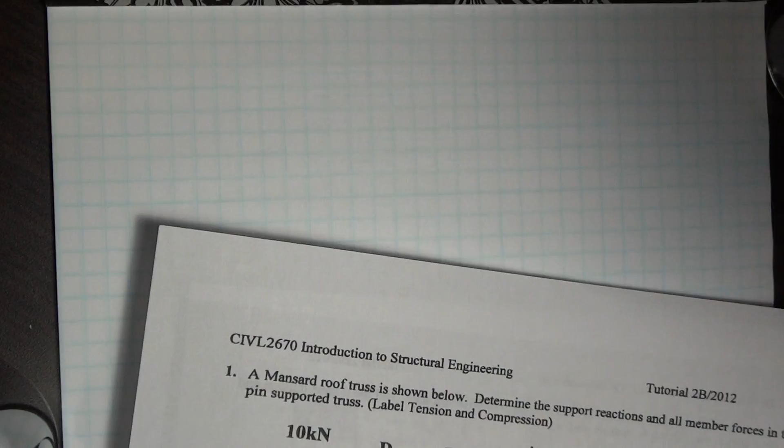Hey guys, this is problem 4 for tutorial 2.

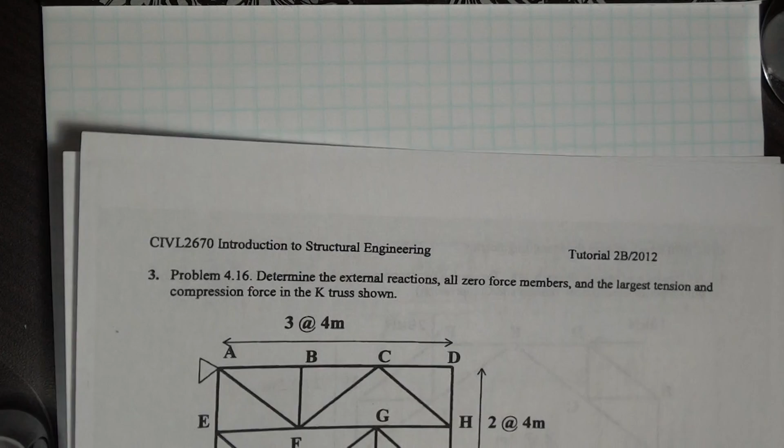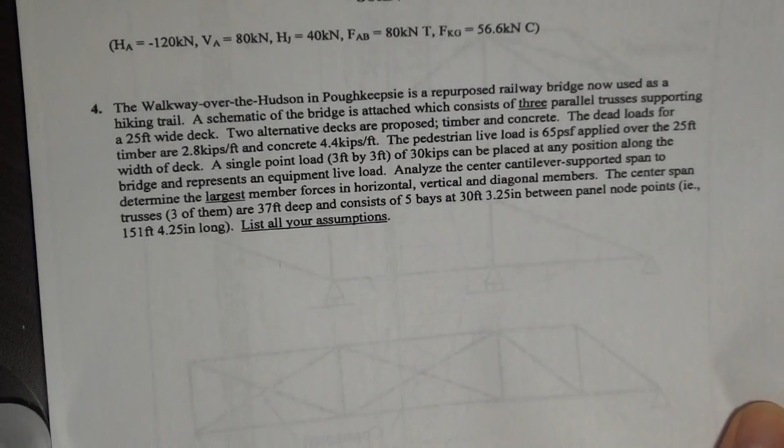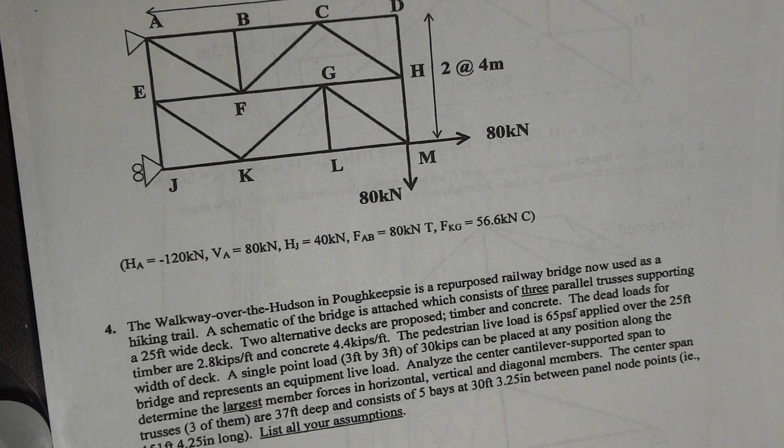But here is problem 4, and I think it might look intimidating, but it's actually maybe the easiest truss problem you'll do in this homework set. The hard part is deciding what to use, because unlike other cases where you had to analyze forces, here you also have to determine what load you want to use.

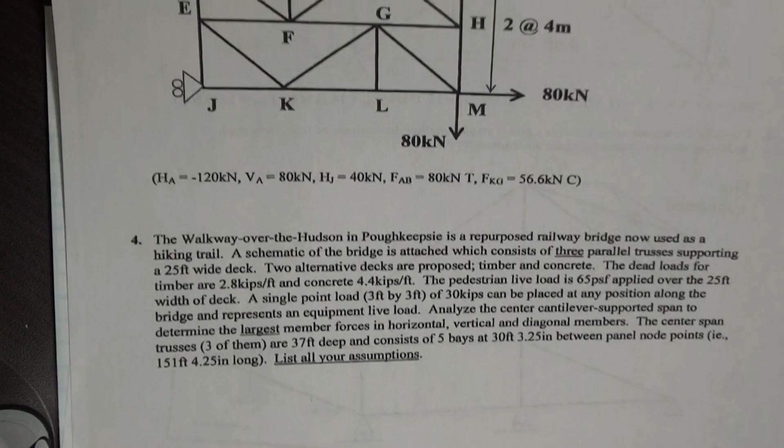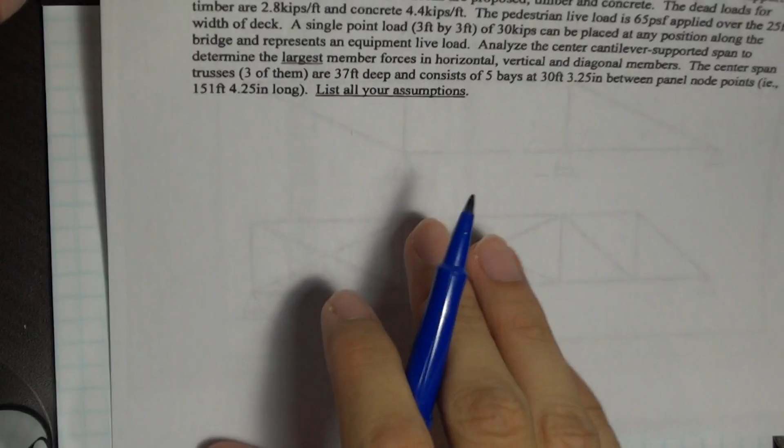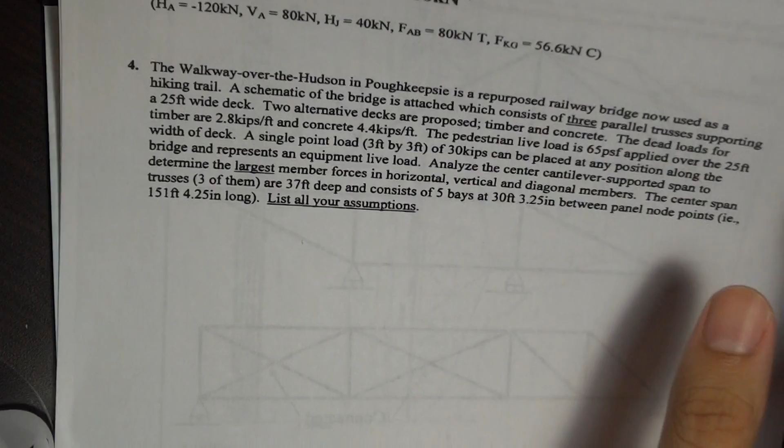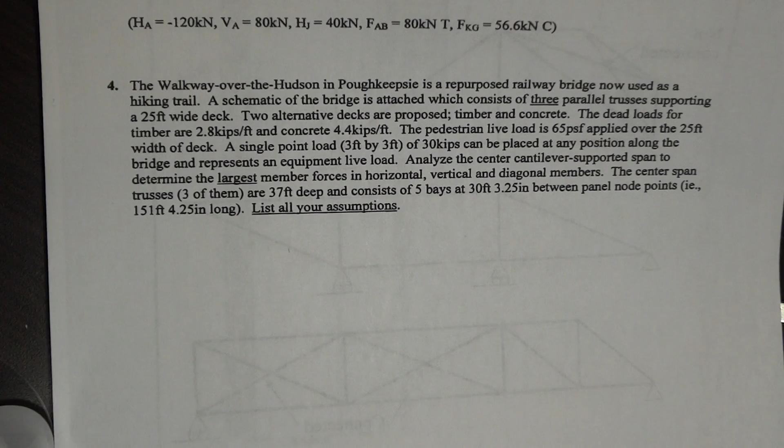It asks you to list your assumptions, and I'm pretty sure that as long as your assumptions are listed properly and are reasonable, you'll get full credit, assuming you do the calculations properly. Everyone's going to have slightly different assumptions, and they may or may not affect your answer. If you came into office hours, I may have gone into too much detail for this. After looking over the solution, I realized the professor is just looking for some very broad answers.

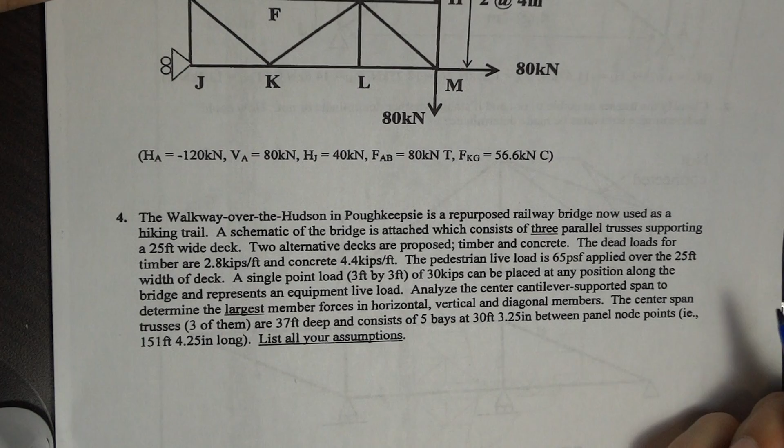Okay, so let's look at this, more of the important things. It says there are 3 parallel trusses. That's one important thing.

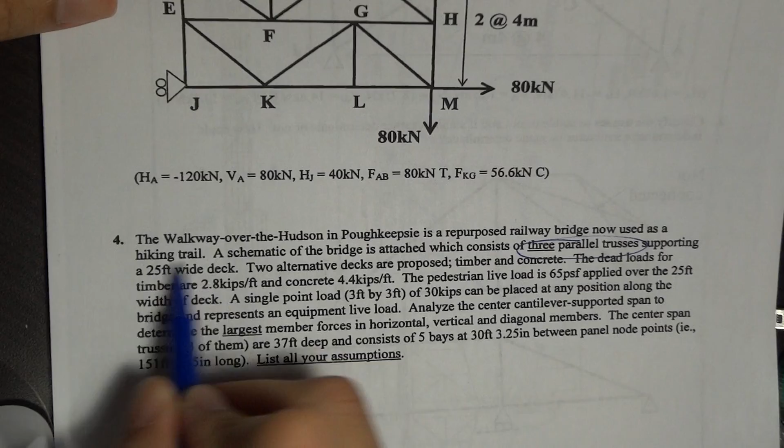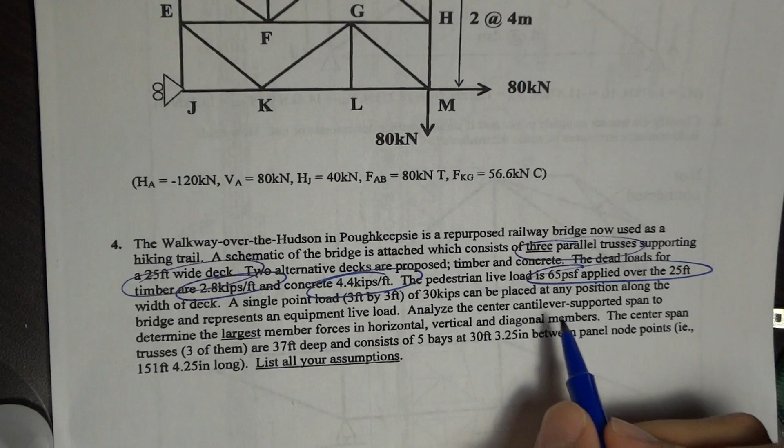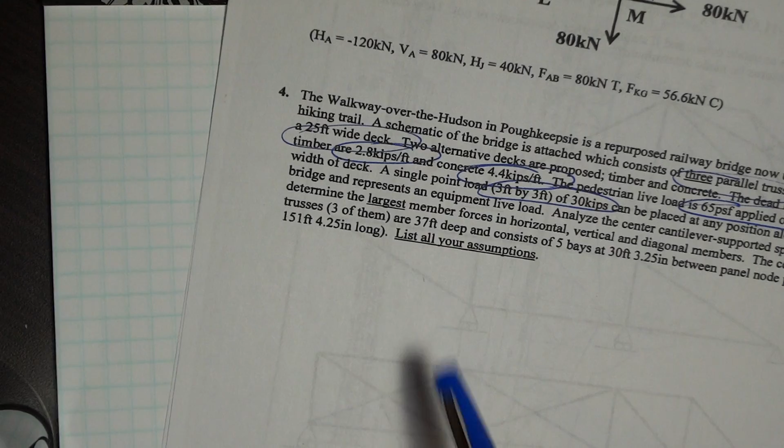The deck is 25 feet wide. The loads are 2.8 kips, 4.4 kips, and a 65 PSF load applied somewhere. The PSF load is your live load, and your point load is 30 kips. These are your given dimensions. You do not need to worry about load factors, but we have to worry about things like how you're going to divide the load on the truss.

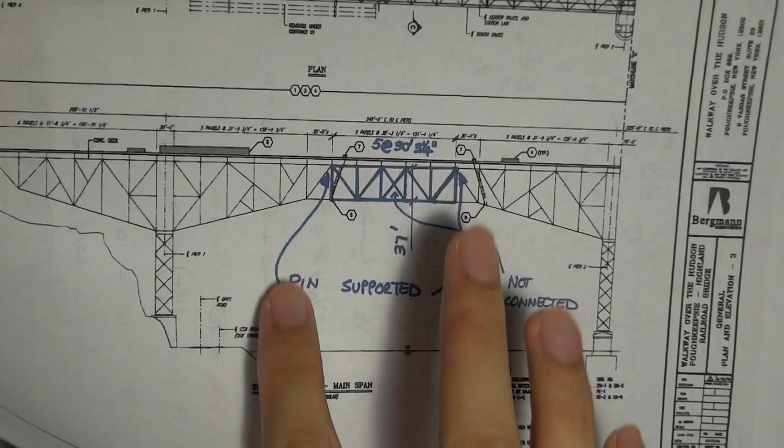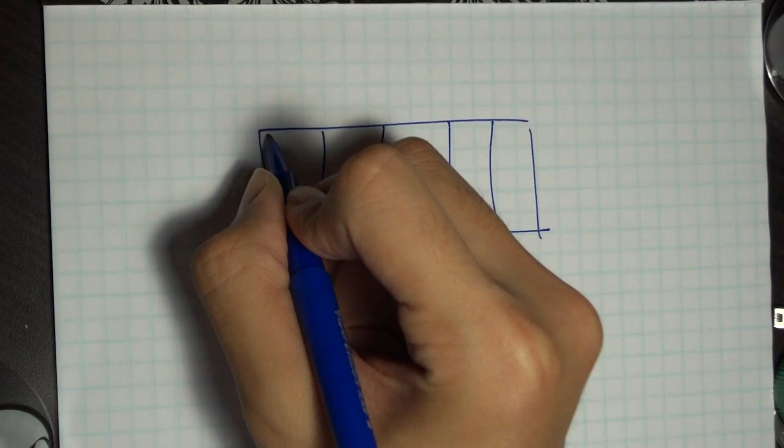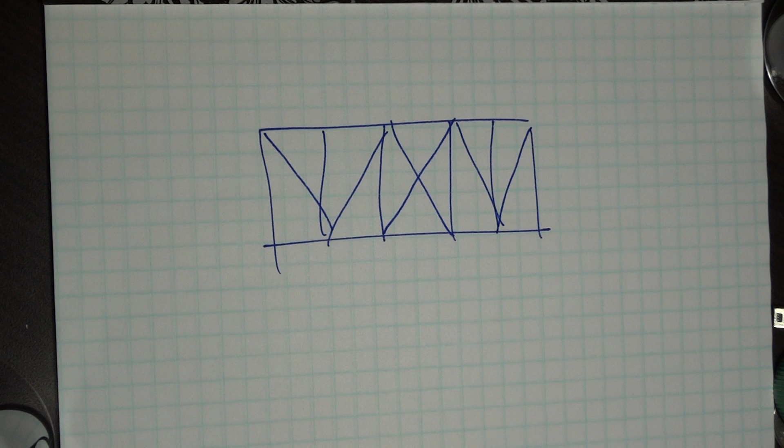So let's look at our truss very quickly. This is your truss, your truss element is here, and I'm just going to draw that for you very quickly. Your truss is divided into 5 equal sections like this. I did not do a very good job drawing it, but you get the idea, you have it in front of you. This is pin, assume this is not connected.

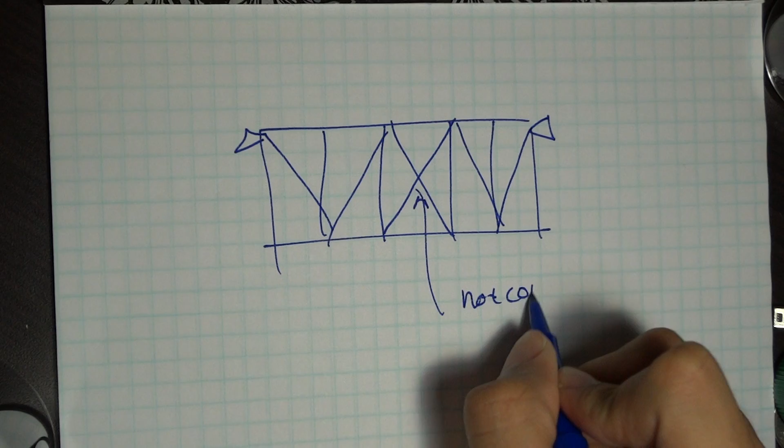Okay, now you know that this is 25 feet wide going into the page. The professor has it drawn right here.

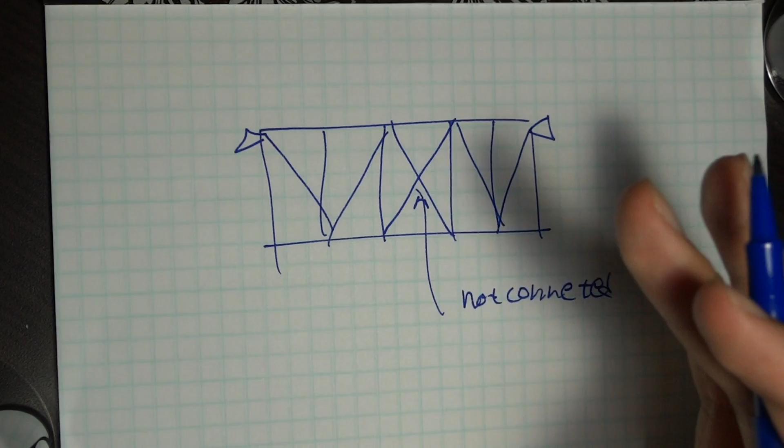There's a couple of ways you can divide this, because although you have 3 trusses for this 25-foot wide span, you don't assume each truss carries the full load. You need to divide it in some way.

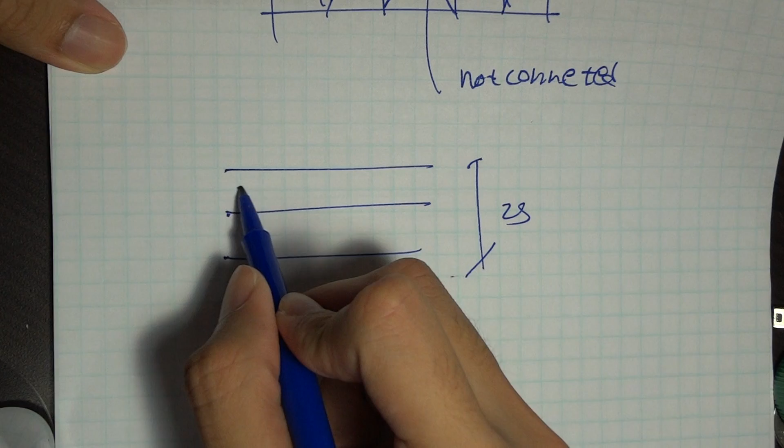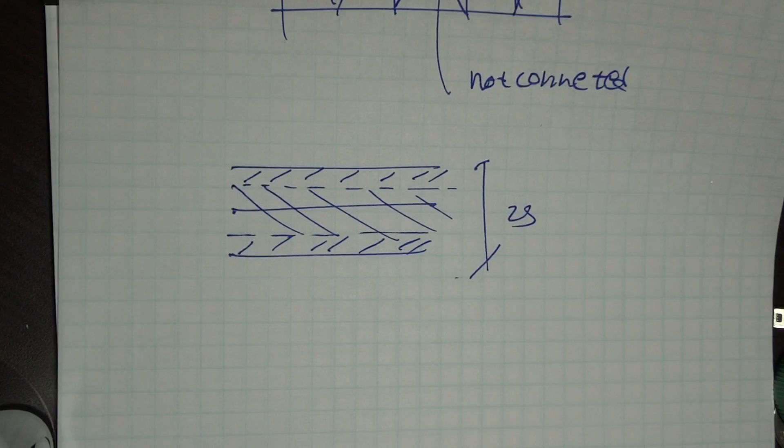Those of you who came into office hours probably remember I told you to do something like this, where this was 25, and pretend this is like a tributary area kind of thing.

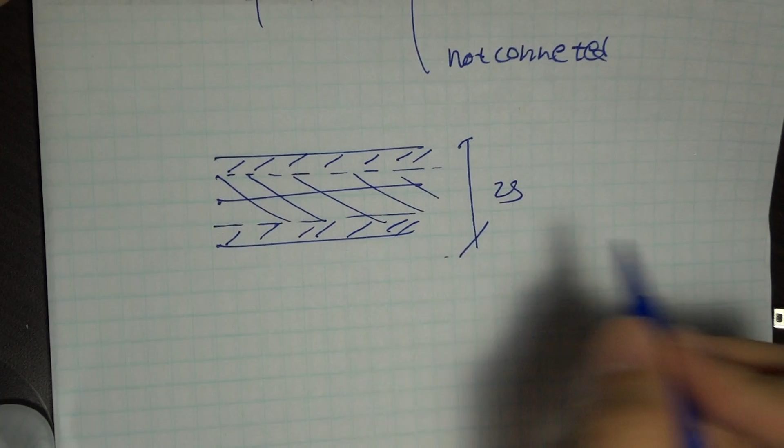So I was saying that this truss would get 1/4, this truss would get 1/2, and this truss would get 1/4. The professor uses a slightly different way, he just says divide it by 3. You can use either, one will probably be a little closer, this one is a little more extreme.

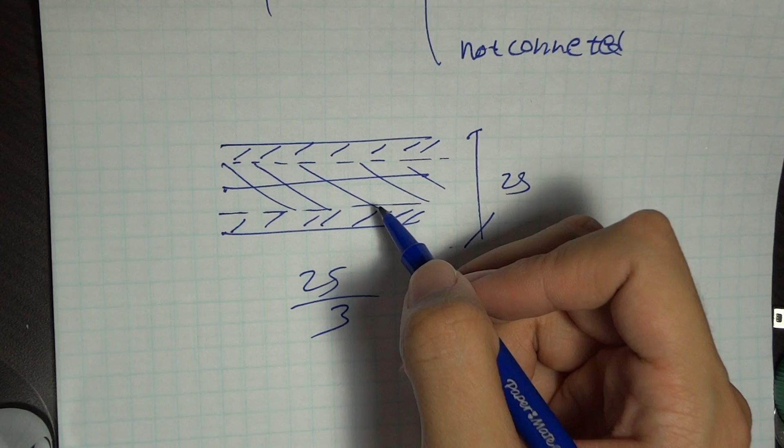But it's up to you, just list this as one of your assumptions. For example, assume the trusses are at the end and center, whereas this one assumes the 3 trusses are spanned equidistant. I don't know what else you want to do for that.

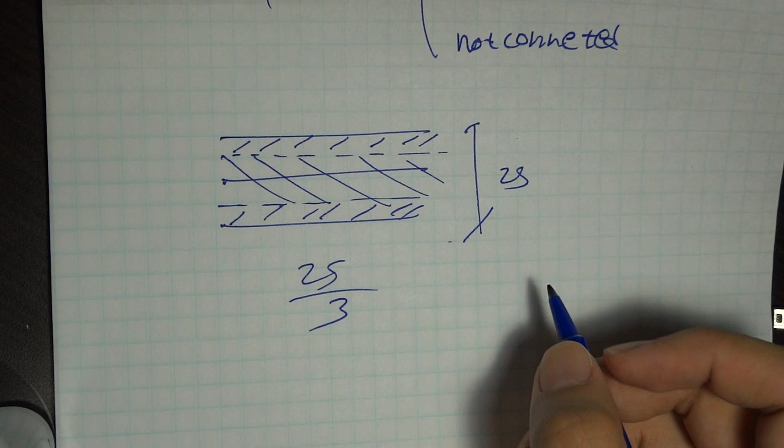Let's go with the professor's example, since it makes the numbers a lot easier to work with. We'll leave this as TW, and this I call T. I would use this for tributary width. It's a term you'll learn later if you aren't doing that already. Some of you who have already taken design courses would probably know more about this term.

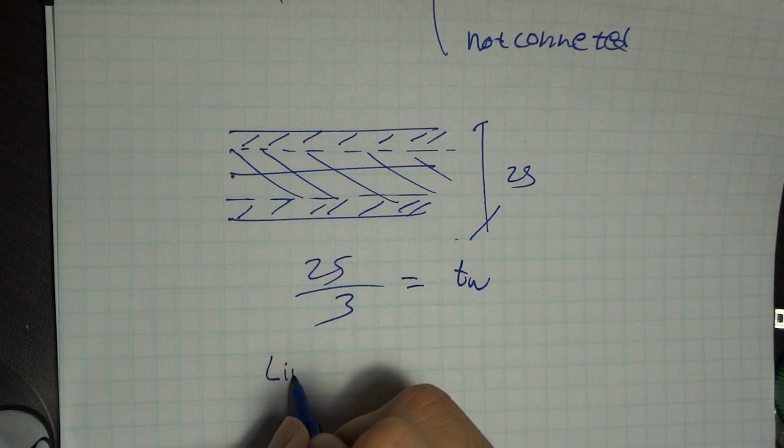Our timber load, our concrete, and our pedestrian live loads are all given in terms of kips per foot already, so we don't need to worry about that. The live load is given in terms of 65 PSF, we don't want PSF, we want pounds per foot.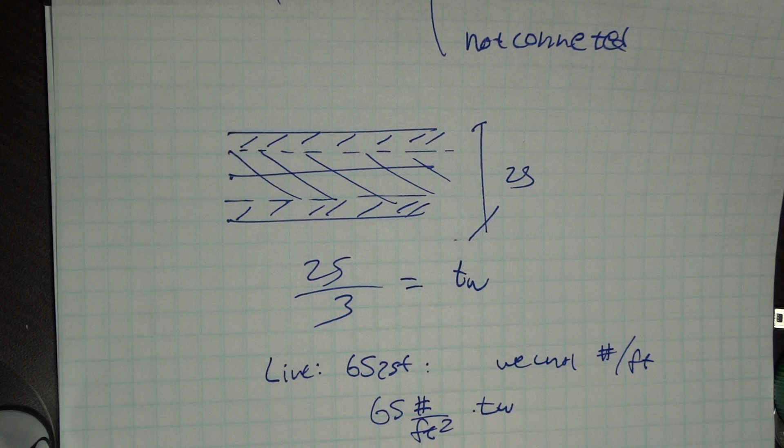So what you're going to do is just multiply times TW, and TW is in units of feet. So this is going to become, and that'll give you the weight per foot of truss. So you have the weight here, and you're going to bring everything to the truss itself, so you're going to shrink it from 2D to 1D.

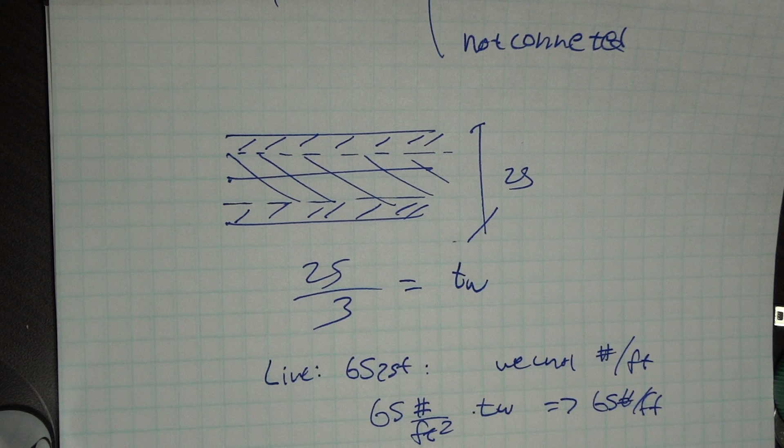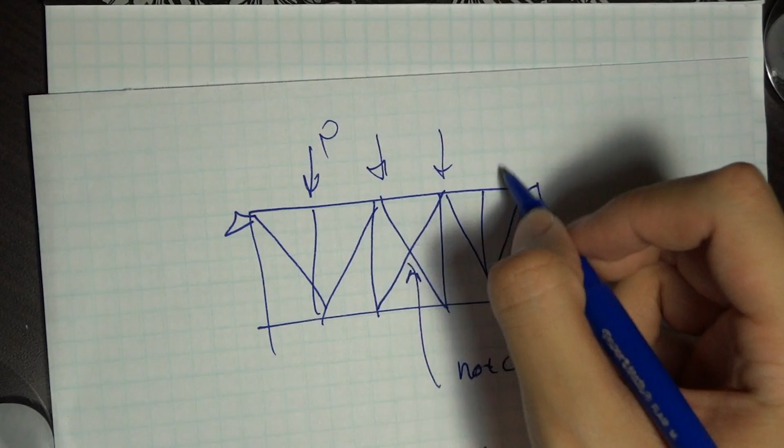Yeah, and then that's pretty much it. I mentioned to some of you that you can put the load P here, but try moving it around to see where you get your maximum P. Like try putting it here or here or here. Well, obviously these two will be identical to the other one, just reversed. But yeah, just try moving it around a little, see what you get.

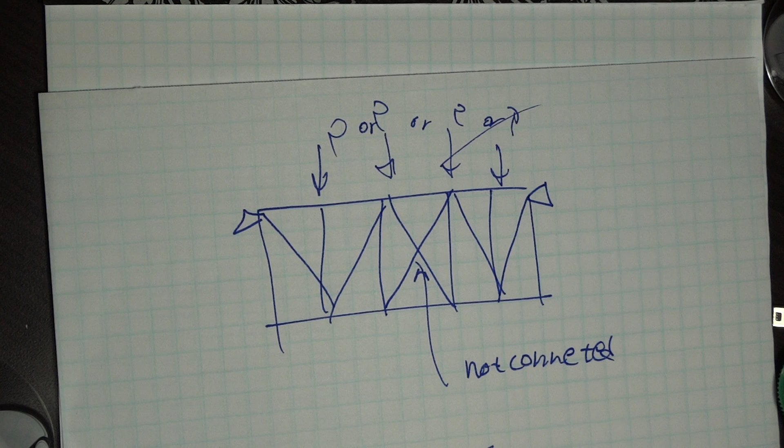Feel free to use RISA for this problem, because RISA will make it easier. RISA is particularly good when you need to move stuff around.

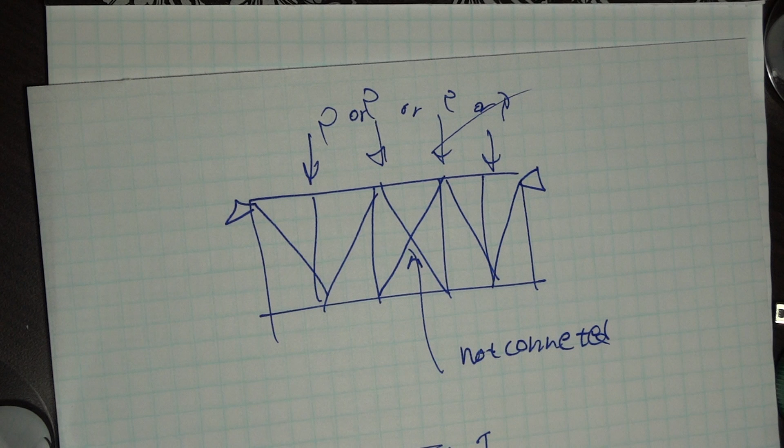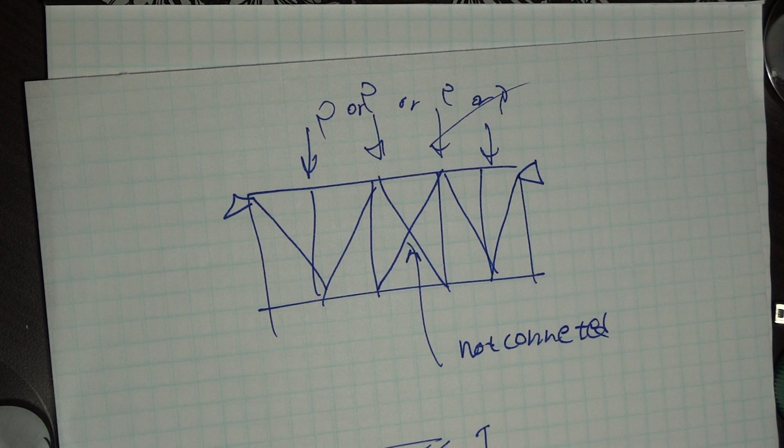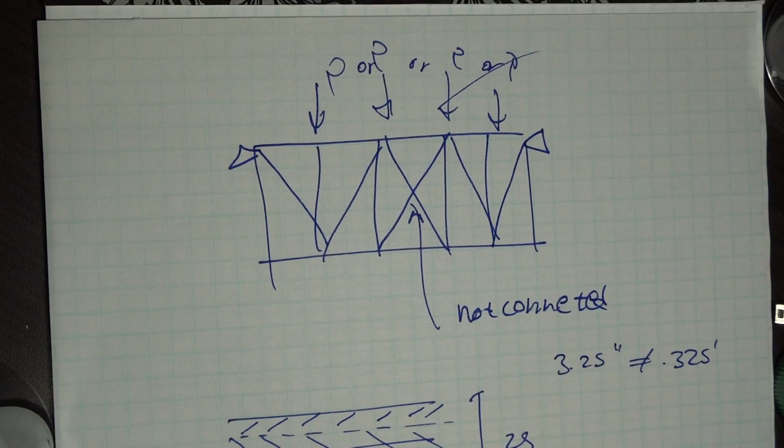That's pretty much it. Don't get thrown off by the dimensions it gives you. The dimensions might look a little bit odd, but all the information is there. You just need to be precise. Remember that 3.25 inches is not 0.325 feet.

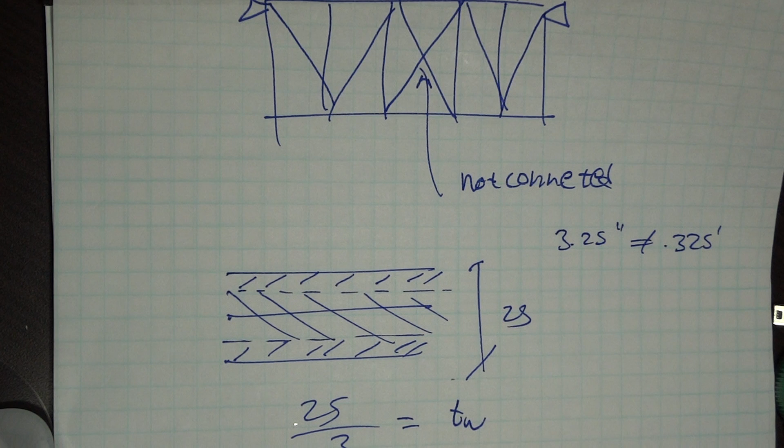I don't know if you guys will make this mistake. That seems like the kind of mistake that I would make. I make very, very silly mistakes. Like I'll punch a number into the calculator wrong, but somehow when I go back to check my work, I'll punch the exact same number wrong every single time I'm checking, which leads to people like, why is this wrong? I checked it 5 times. But yes, this is...

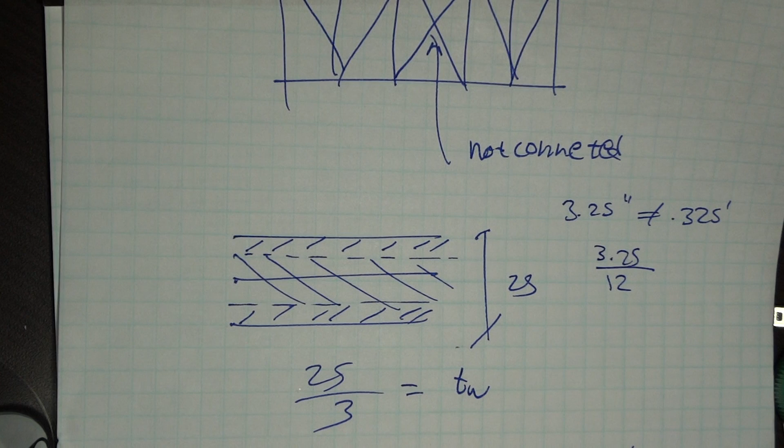to get just divided by 12, and you should be set. But yeah, let me know if you have any questions.

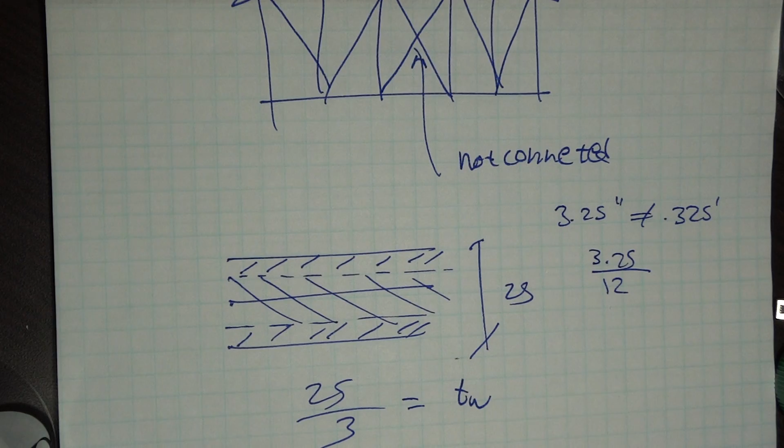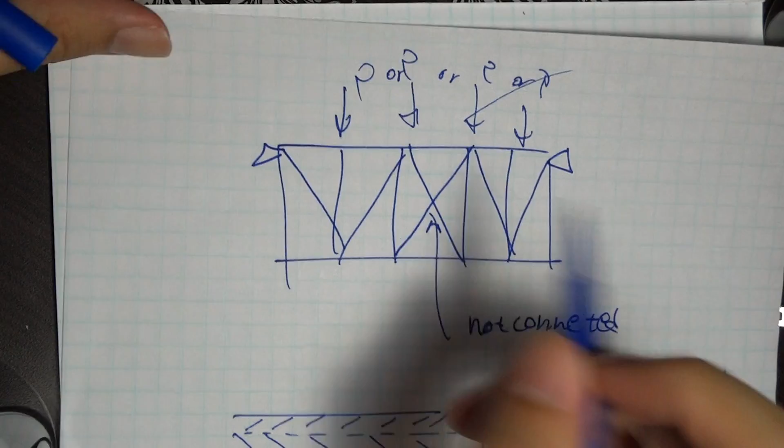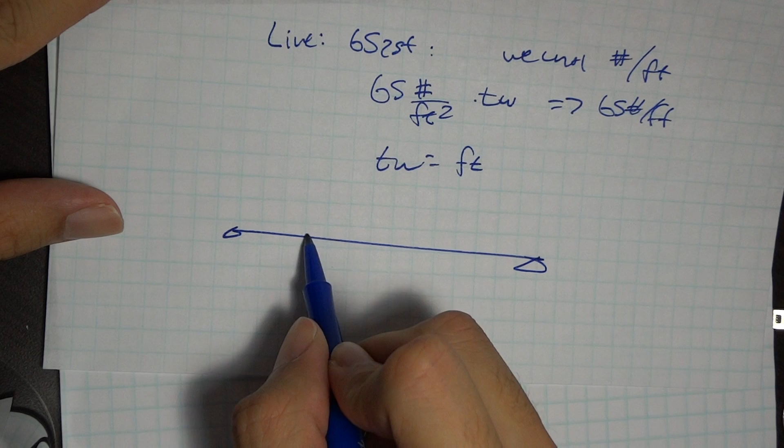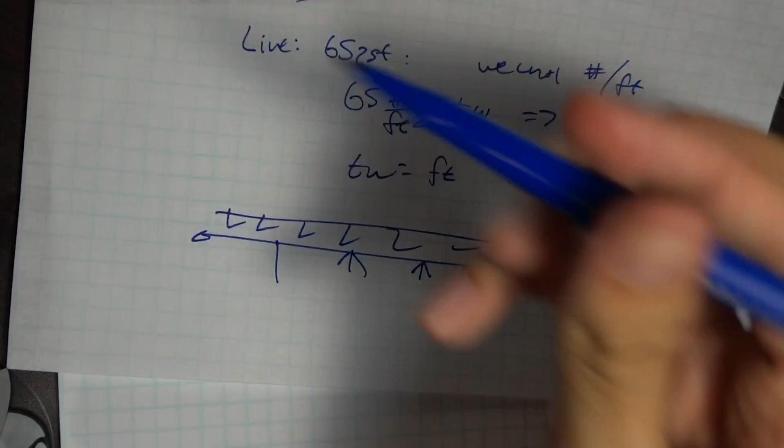One thing: do not, when you're modeling this, treat it like this. When you're modeling this, you need to bring all the loads. So you have your truss, and your truss has things like this. You cannot do this, you cannot do this, don't do that, you cannot do this. What you need to do is take the load here and bring this whole area into a point load, so you get a truss that looks like this.

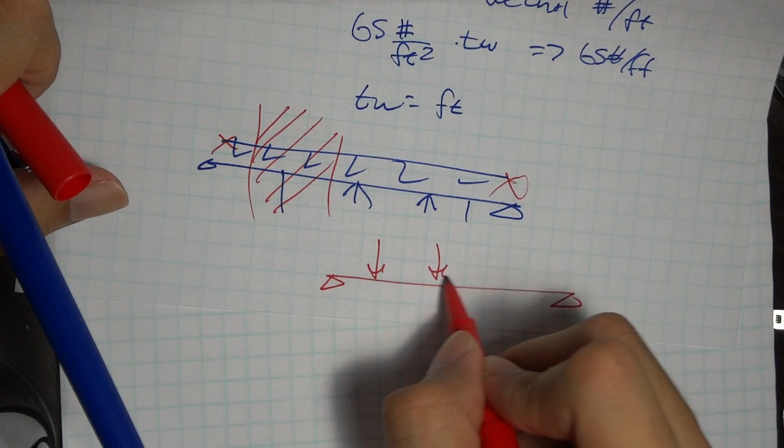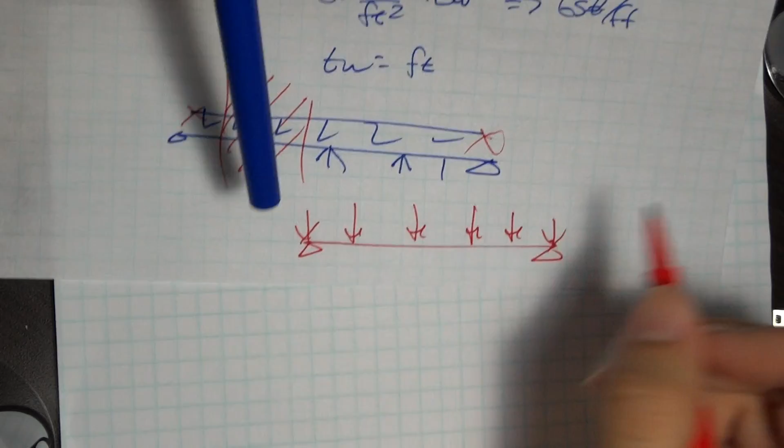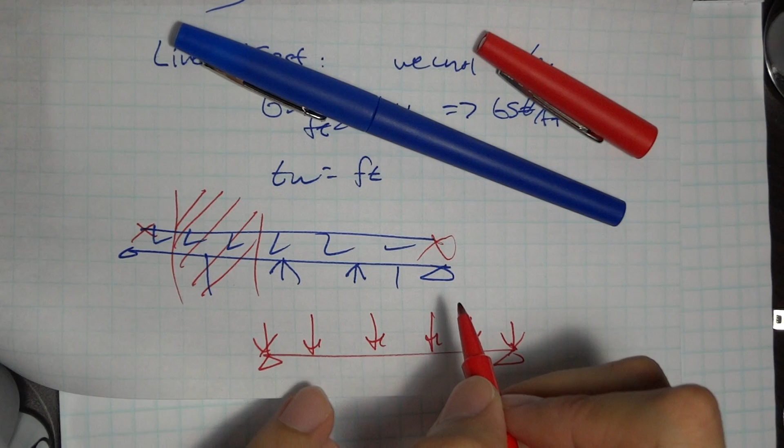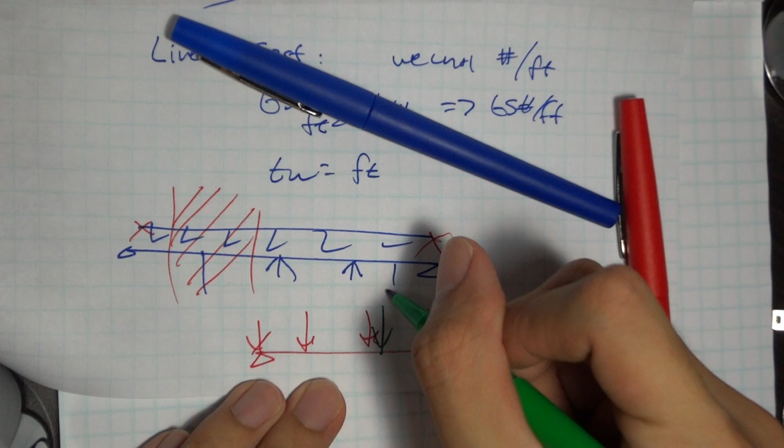So you're gonna have, if these are now your point loads, these are the distributed loads, and then you're gonna have one point load. We'll call that P prime. Let's call this L equals total...

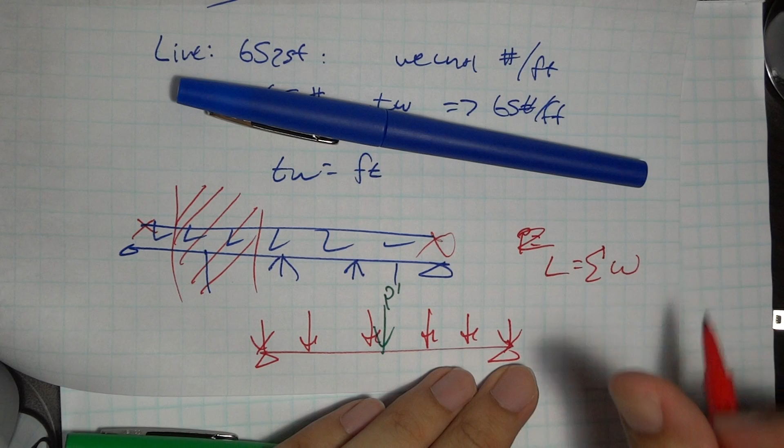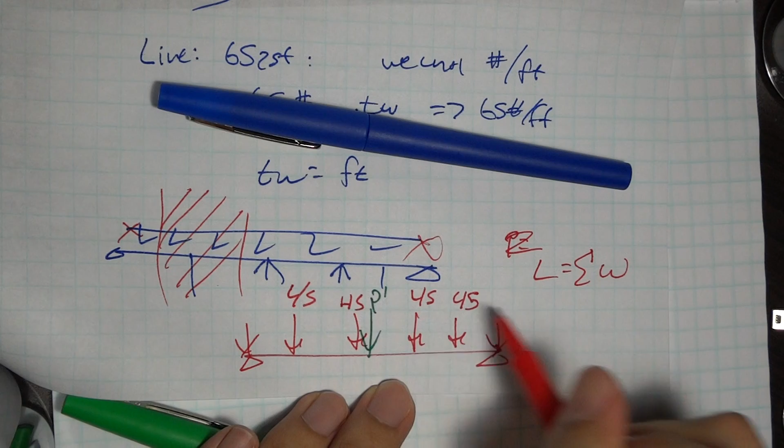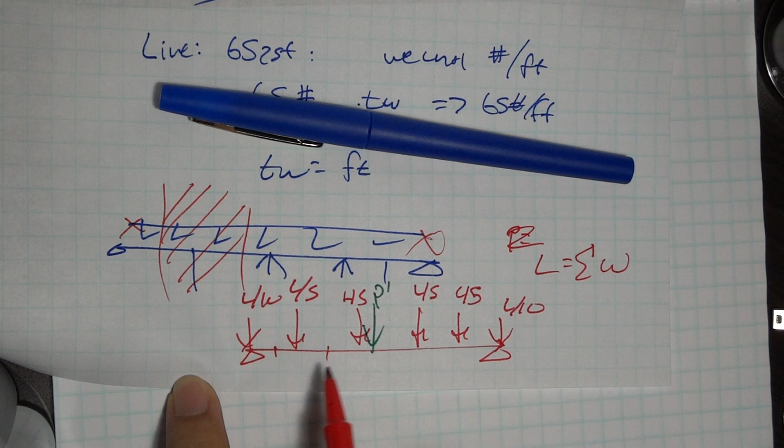distributed load. So this is going to be L over 5, L over 5, L over 5, L over 5, L over 10, and L over 10. The reason why these two are L over 10 is because when you add up all these, you're going to get L, and L over 10 at the far ends because they only have half the area. So this should be twice as long as this.

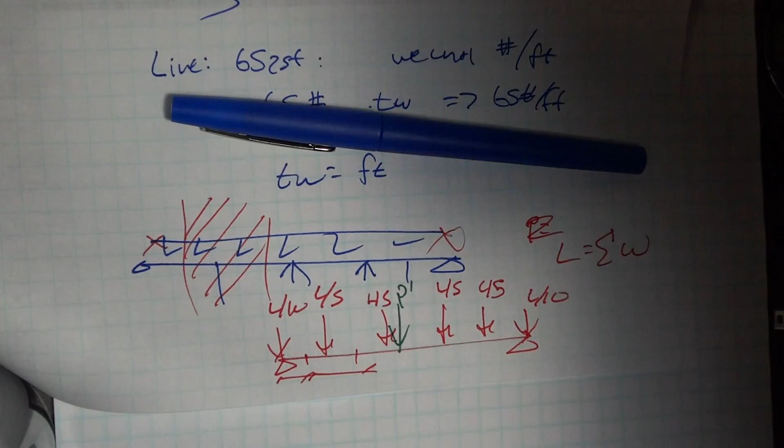Okay, sorry for throwing that out there, but definitely let us know if you have any questions on how you're modeling that. The reason why you need to do this is because you're using a truss, and a truss can only be loaded at the joints, like you learned in the lab. But let us know if you have any questions. I've said that several times now, but this is actually the end.